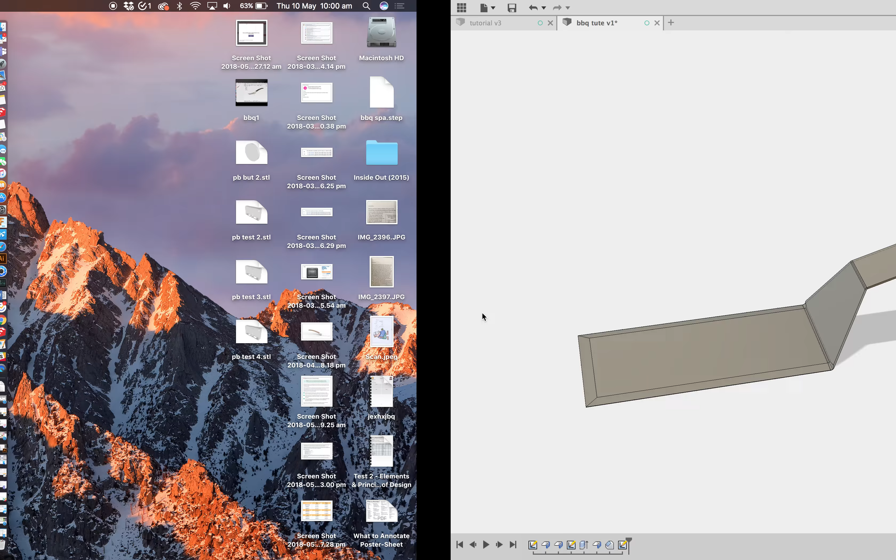Okay, today we're going to create the handle for our particular BBQ Mate that we've made. So we've made the blade in the last tutorial, and now we're going to actually make this handle here.

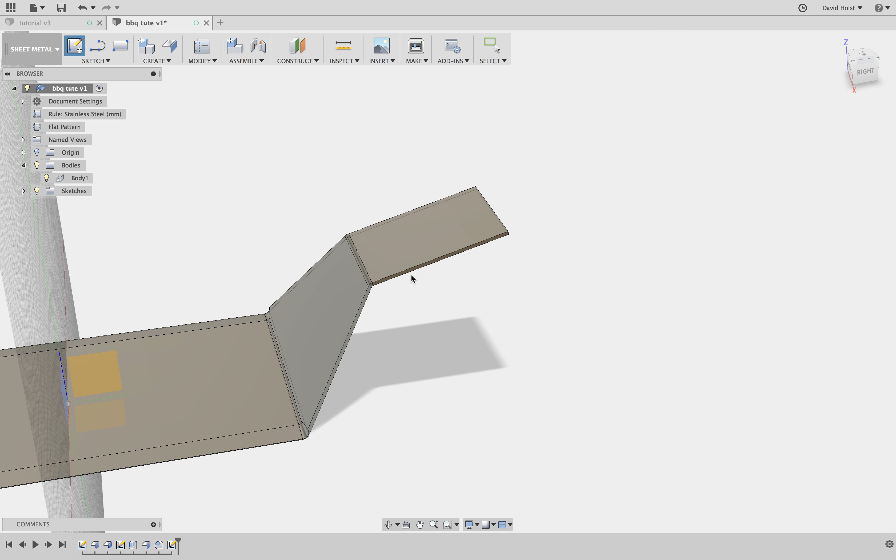The first thing we want to do is create a new body, which is this handle here. So we need to create a sketch, and we're going to use the edge of the tang here because that's going to be flush with the edge of the handle.

I'm going to roll my mouse over, so I just select that little part of that edge there, and I'm going to click, and it's going to bring me over to the right hand side.

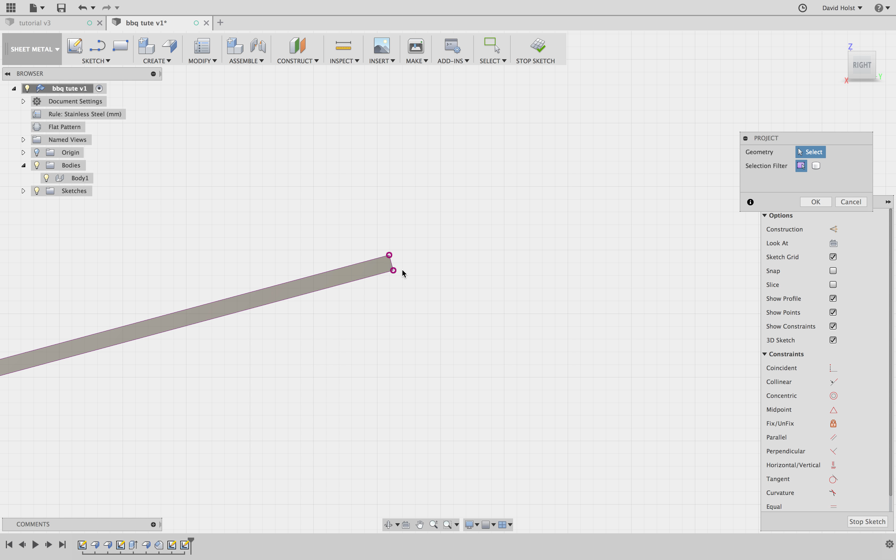The first thing I need to do is project the geometry of the tang through, so that I don't have to redraw it. So I hit P for project, and then I select these three lines here, and I'll zoom in a bit, and make sure I get the one at the back. Hit OK. And now I'm ready to start drawing the actual handle.

Now, I'm going to try and make this sort of blend in a bit better. I'm not happy with this angle here, so I'm going to go back and show you how to change that as well.

Later on, for example, if I got to this stage and I wasn't happy with this angle, what I could do is actually go stop sketch. And I could stop doing what I'm doing there.

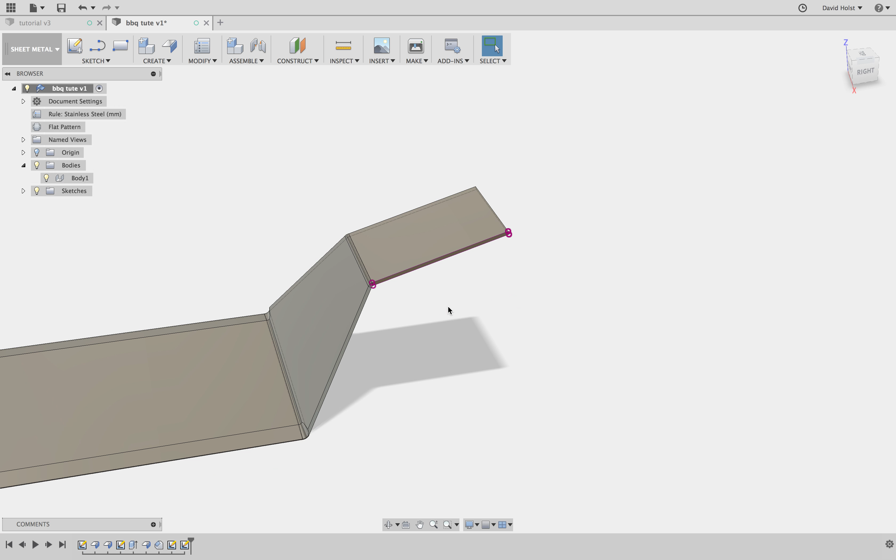And I can come over to the right hand side, and I could grab that flange, which is this one here, I'm pretty sure. So down here on my timeline, down the bottom, I could double click on that, and I could say I want that angle to be a bit flatter.

So I'm going to change that to 50 degrees, and I'm going to hit enter. And I've changed that. That's 100% okay. Now if I wanted to kick this handle up a bit here...

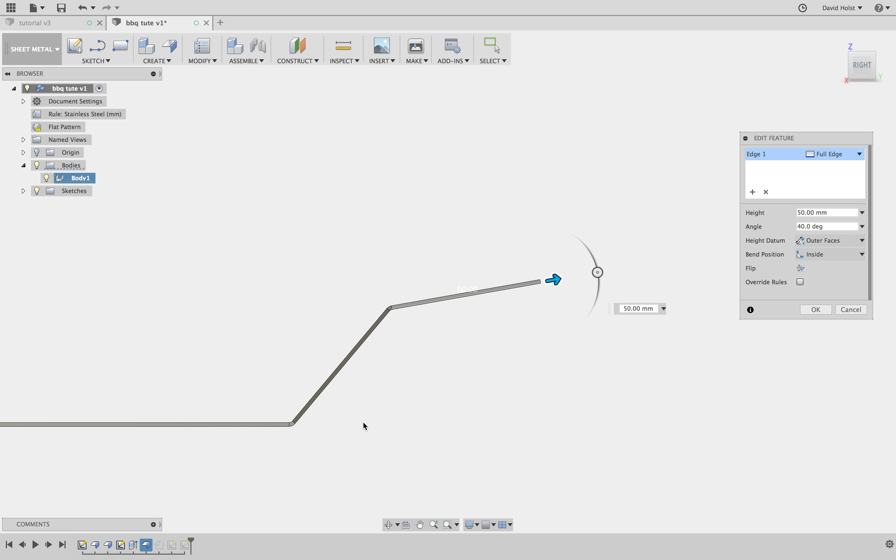I could double click on him there, and I might decide that I want to push him up to 35 degrees and hit OK. So that's the whole point of parametric modeling, is that you get this timeline so that you can continually adjust things.

And if I wanted to go back and go to the sketch I was working on, which is the last guy here, I double click on him, and now I'm back working on this sketch again like I was before. So it's always very easy to go back and change things if you want to.

So I'm going to start drawing. I'm going to hit L for line. I'm going to click on this dot here, and I'm going to push up perpendicular. And I'm going to call that, let's say, 4 millimeters.

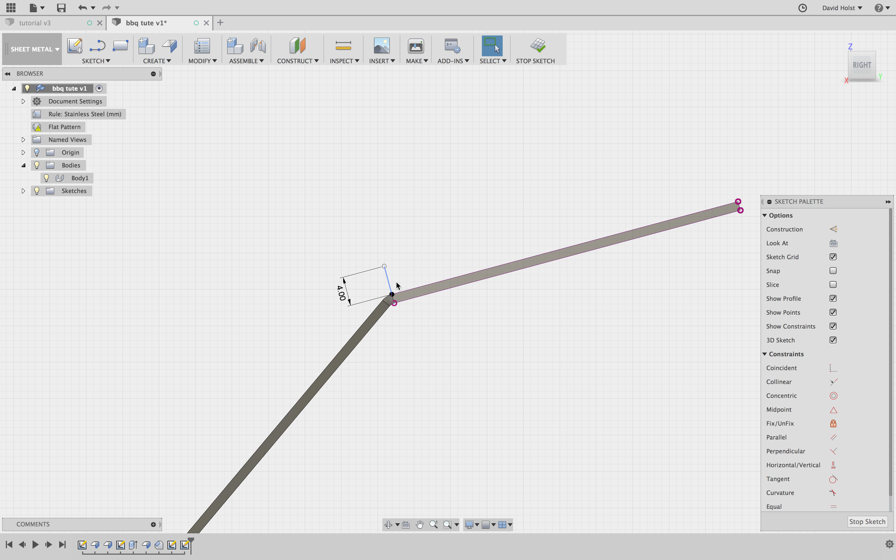And I'm going to do another one coming down here. I'm going to snap to the dot again, get that perpendicular snap, and you can see that by that little right angle icon that I've got there. I'm going to go another 4 millimeters.

And I'm going to zoom out and move across, and try and get a bit of a curve happening in this handle. Yeah, I'm going to sort of guesstimate this and do it by eye in proportion to the blade. So I'm going to hit S, type in arc, and do a 3-point arc.

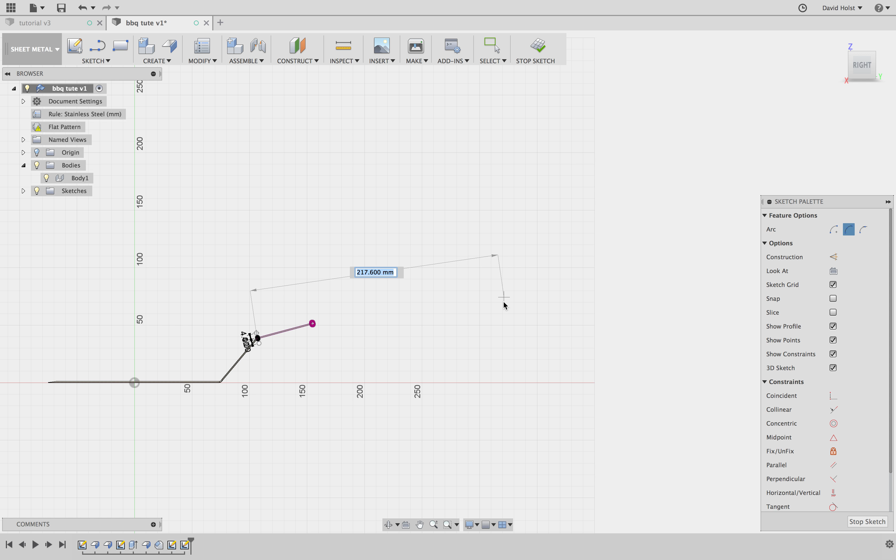And I'm going to select that dot at the end. I'm going to come back to about here, and do something with a curve in it, sort of like so. Okay, I'm going to do another arc on the bottom here.

Going to have a slightly fatter handle on this one, I reckon. I'm not quite happy with that, so I'm going to hit escape.

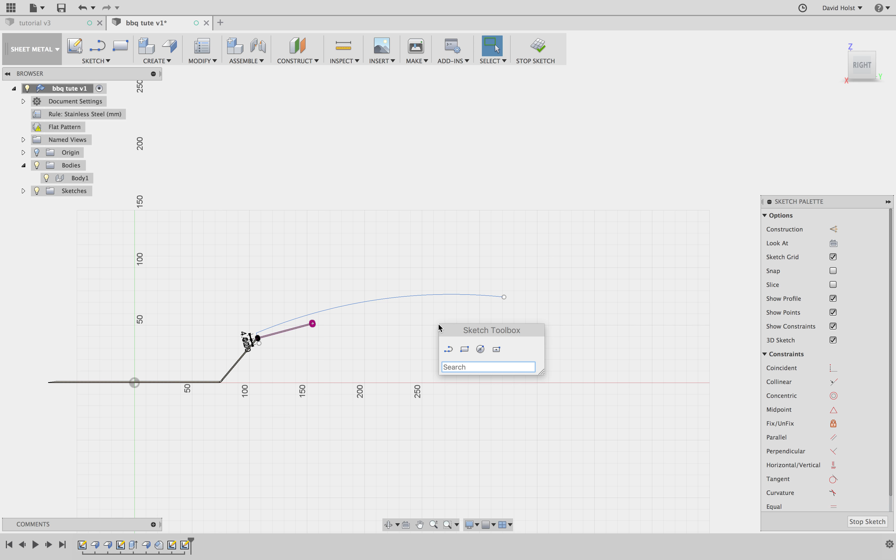S, arc. I'm going to have another go at it. Jump on there. Maybe just make it a bit thinner up here. Sort of like that, maybe. And then I'm going to get my line tool, and I'm going to put a bit of an angle on the back here.

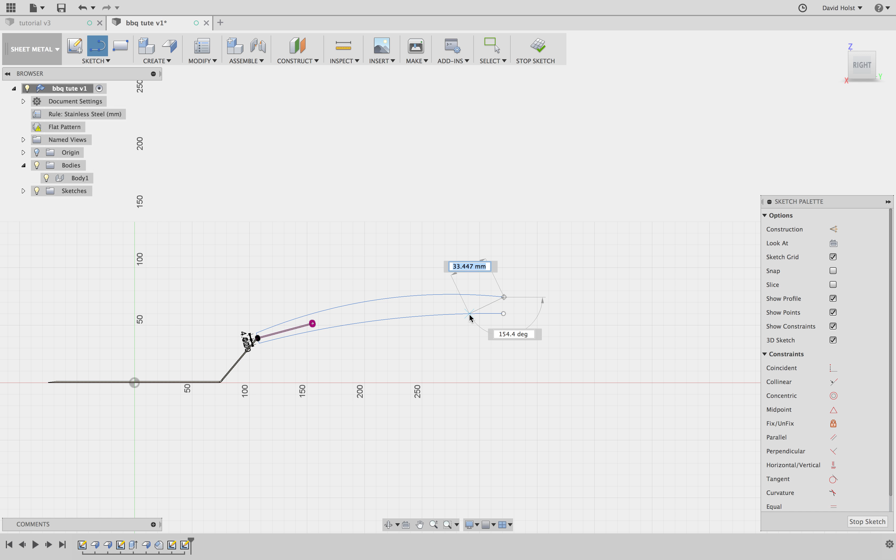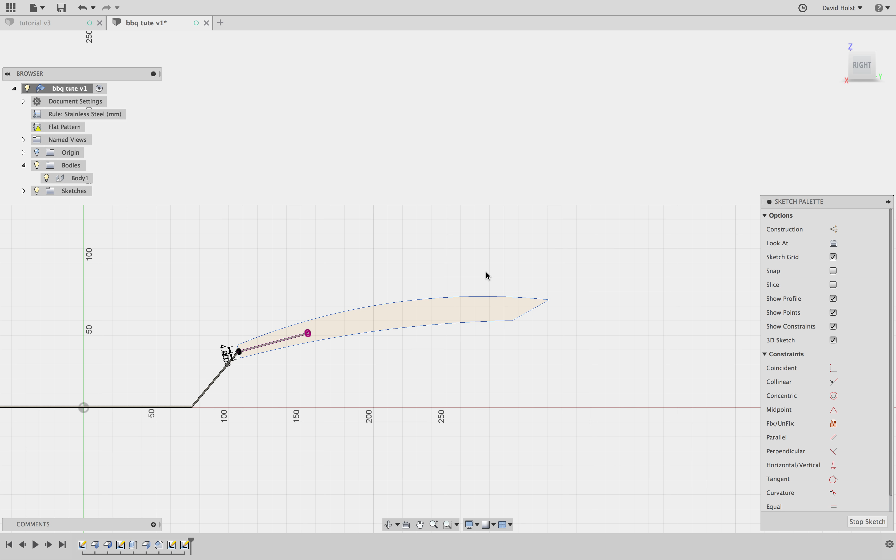I'm going to hit T for trim. I'm going to cut this section out here. Have a bit of a look and see what that looks like. It's quite a small handle, but I think that's going to look okay.

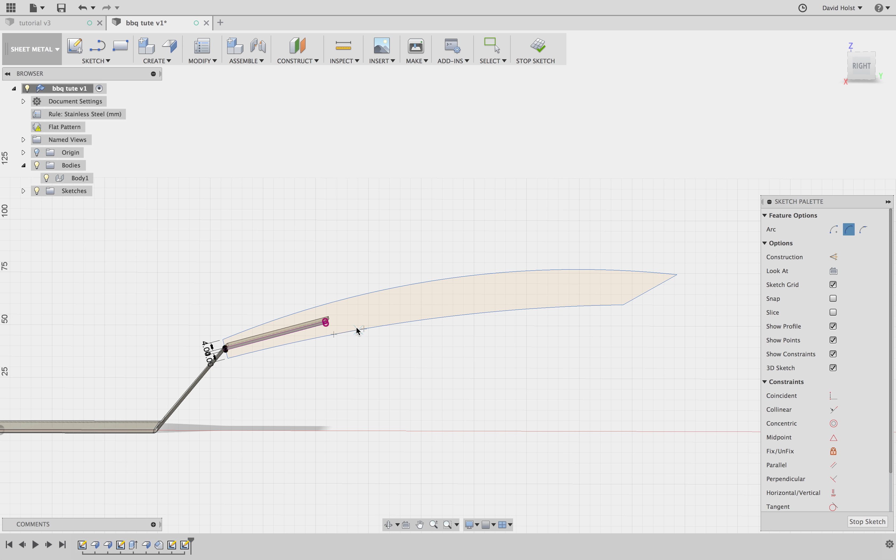Now, if I wanted to put, say, a couple of finger grooves in here, I could. So I could hit S, type in arc, 3-point arc, and I could just try and put in a couple of small finger grooves. I'm going to zoom in so I can see right. So I can go something like that. Something like that, so and so and so. You can easily change this shape to whatever you really want it to look like just by experimenting.

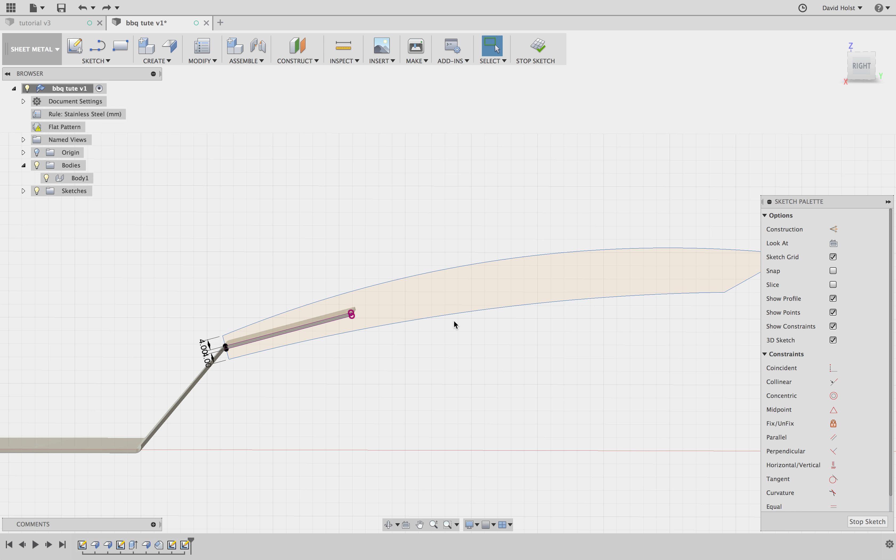I'm going to take them out because I don't really want them on mine. Now what I'm going to be able to do is actually extrude that shape and make my handle.

So if I hit E for extrude, I'll be able to click on that shape that I've drawn, and I'll be able to push it back 38.

Now it's getting upset at me because it can't cut something. So what I need to do is go to my extrude box and change some of these parameters. So the operation I'm going to change to a new body, and that's going to go back negative 38.

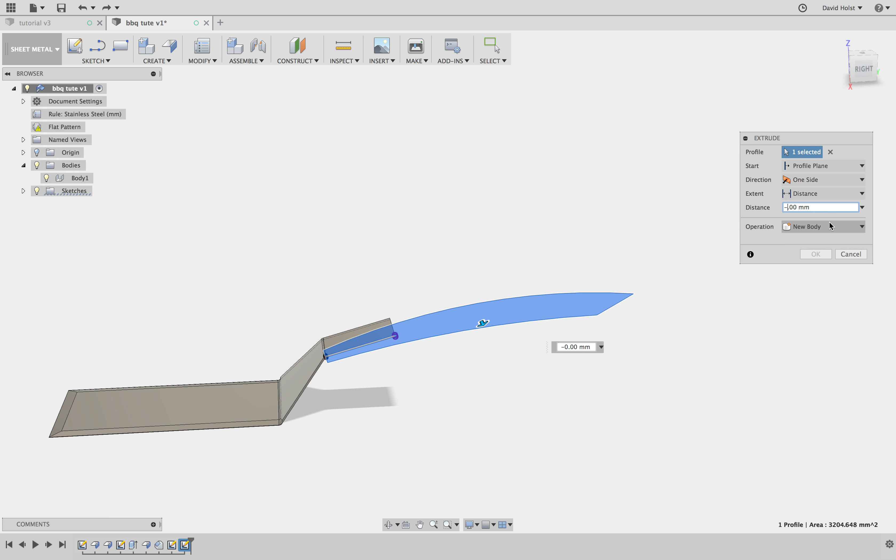And hit enter. I'm starting to get something that's pretty big and chunky, to be honest, but I'm starting to get something that looks like my BBQ Mate.

Okay? So I think the most obvious thing that needs to happen is I need some fillets. I need to start rounding some stuff off on this particular design.

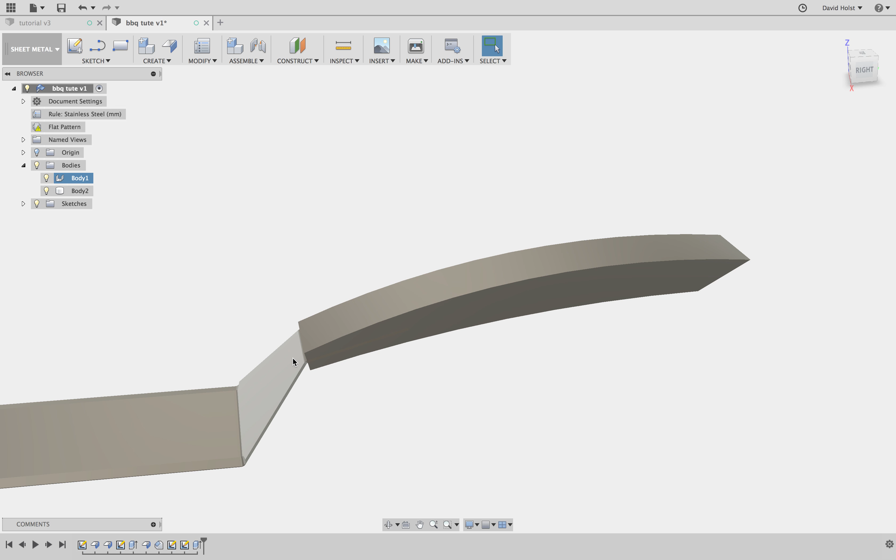So I think the first thing I'll do is I'll hit F for fillet, and I'm going to fillet these front edges off so they blend in. So I'm going to select that top edge there. I'm going to shift middle mouse button so I can see underneath. Select that one. I'm going to put maybe a 4mm fillet on those, I reckon, so they round in.

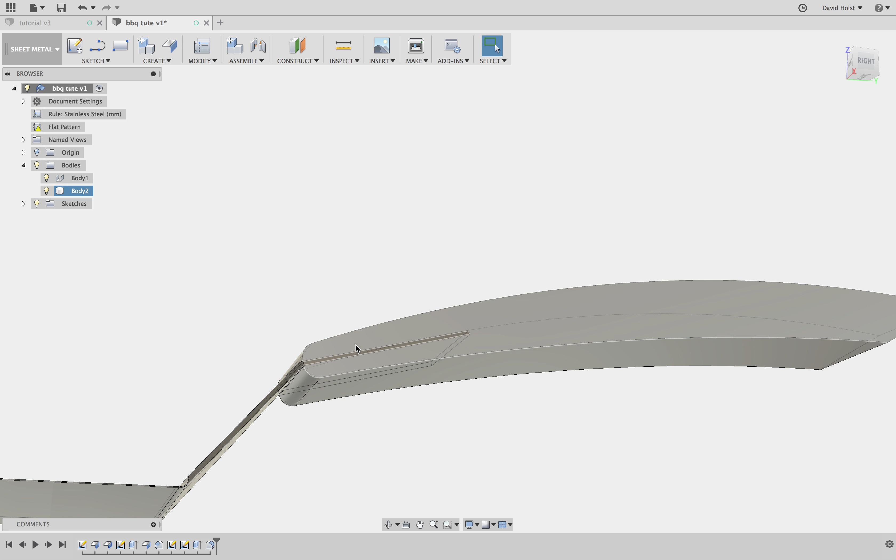Yeah, that looks pretty good. Probably going to round these ones off on the back.

So I'm going to hit F for fillet, this guy on the back. Type in 4. That's far too much. I think I'm going to go about a 2 on there.

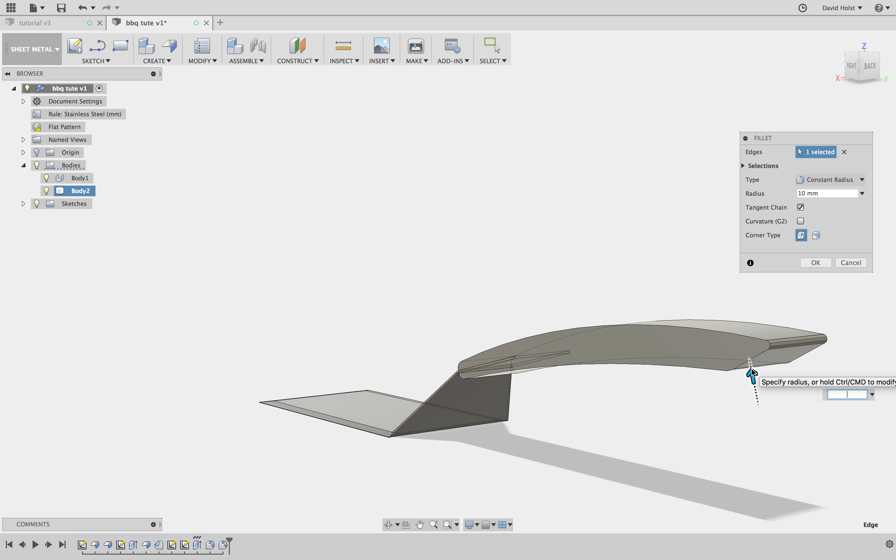F for fillet, this bottom one here. I want quite a big radius on that, I reckon, to make it look good. So I'm going to go 20mm on that one there.

And then now I need to actually round the outside. So I'm going to hit F, click on that one. I might as well do the other side while I'm at it. Shift middle mouse button. And I'm going to 4mm.

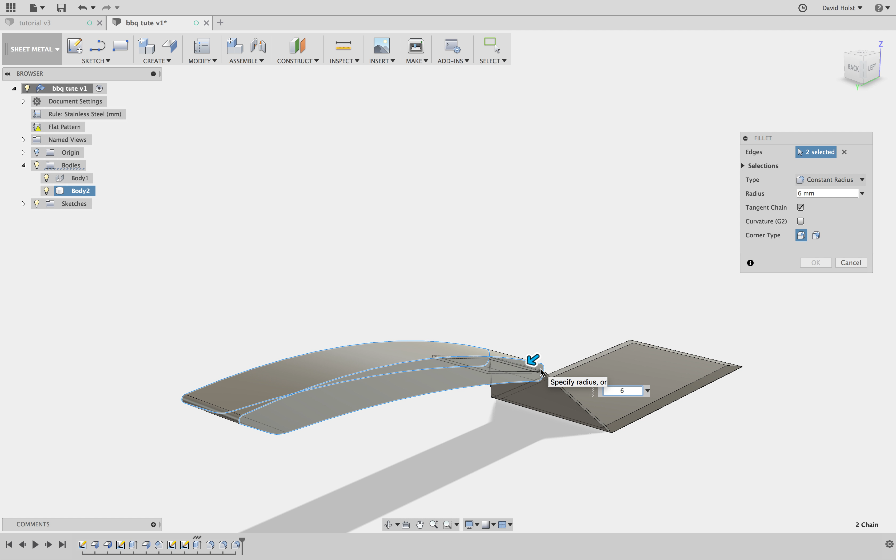Maybe 6mm. It's not going to like 6, not going to like 5, 4. Yeah, 4 is going to work. Oh, because of these middle round ones at the front. So I'm going to go 4 and hit enter.

And now I'm starting to get something that looks a little bit better.

Now what I'm thinking as well is I might actually put a hole in the back here. Now the hole could actually be quite difficult to draw because you've got a curved plane on here. So what I'm going to do is I'm going to actually create a work plane. So I'm going to go construct up here. Click on an offset plane, and I'm going to click on this flat part of the blade.

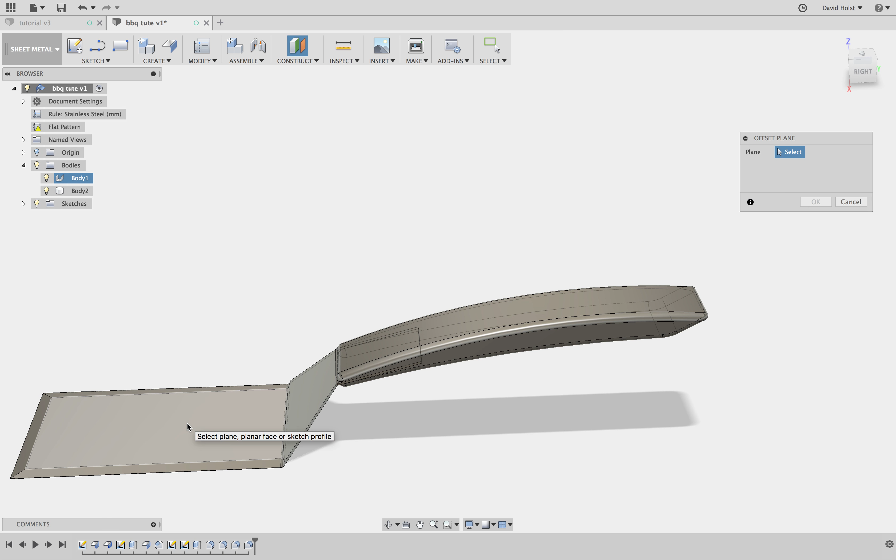Click on him. I'm going to push up, I don't know, 100mm should be fine. Type it in. Hit enter.

And I'm going to go sketch, and I'm going to click on this new work plane that I've created. Just going to bring us around to here. Now I'm going to make sure I can see the end of my handle.

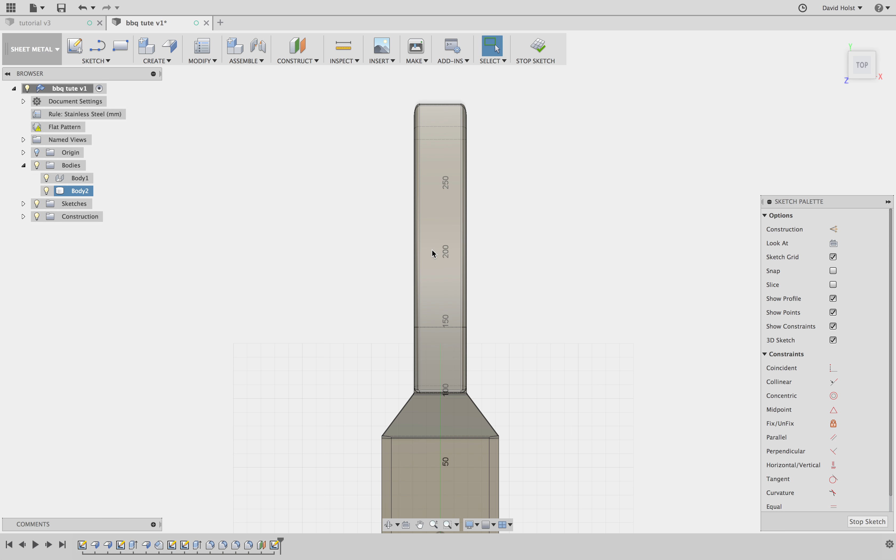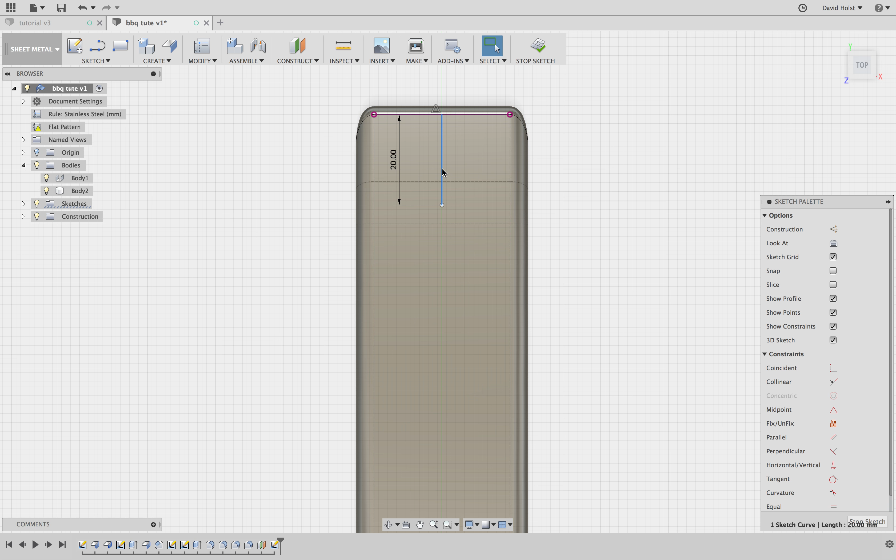First thing I'm going to draw is a center line. I'll hit L for line, snap it to that triangle there, push it in, and find the center point. I'm going to guess and come in about 20mm, since I've got a chamfer underneath it. I'll click on that line and hit X to turn it into a construction line again.

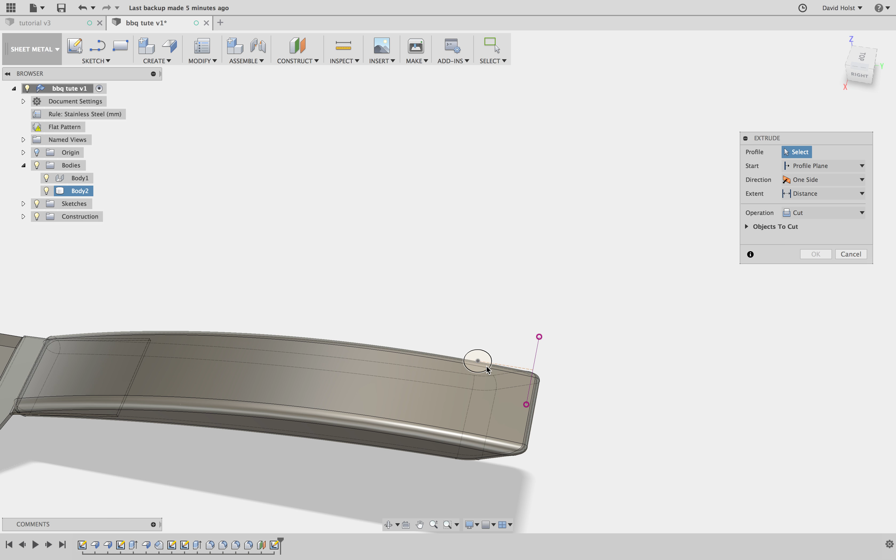Now I need to actually cut that hole through. I'm going to hit C for circle, snap it to the end of that line, and let's call this a 10mm hole. So we'll go 10, enter, enter. I'm going to use that to drill the hole out, hit E for extrude, click on that hole, push it the whole way through, and hit enter. And I've got a hole.

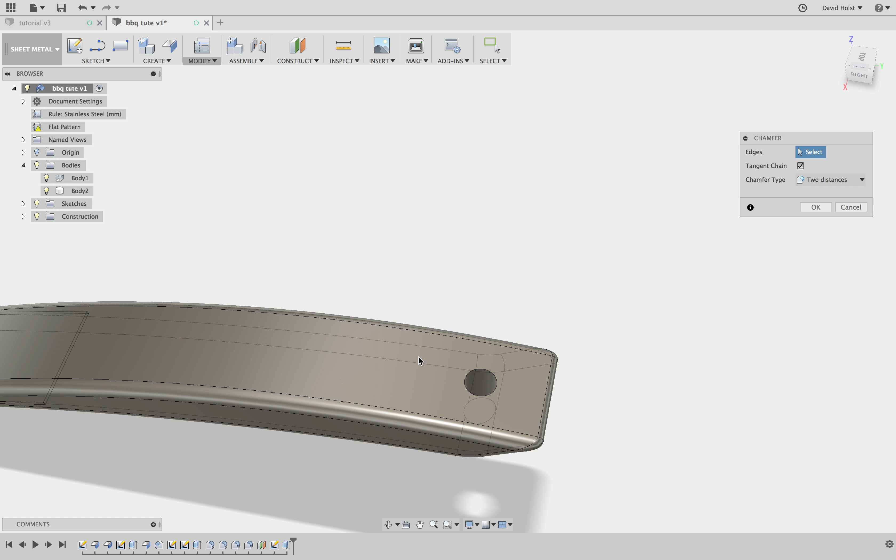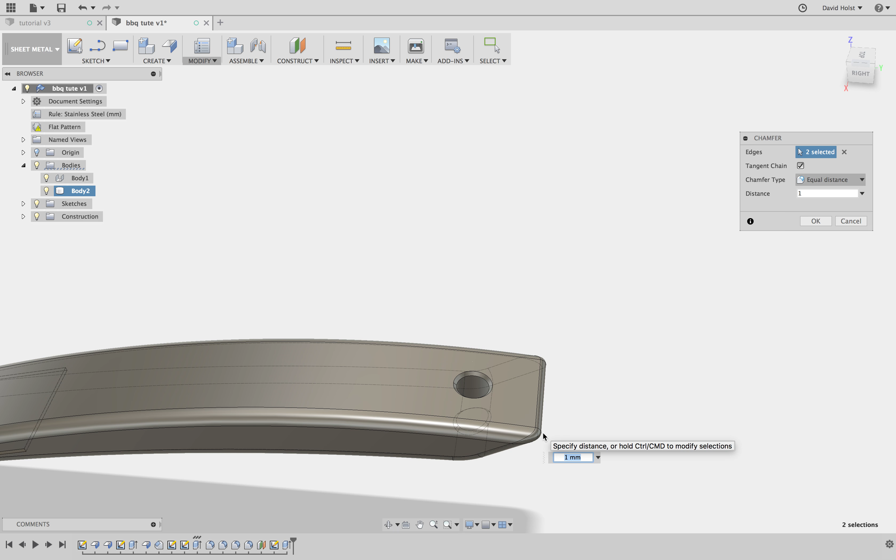Now I might chamfer that to make it look a little bit better. So once again, I'm going up to create, drop down to modify, drop down to chamfer. I'm going to select the top part of that hole to the top line, and I might see if it'll do it to the bottom line too. It might not like it because it's a compound curve. I'm going to go equal distances and call that 1mm. Let's see what that looks like. Yeah, I reckon that's pretty cool. Enter. And so I put a hole in it.

Like so, and I'm starting to get something that looks kind of like what I'm after.

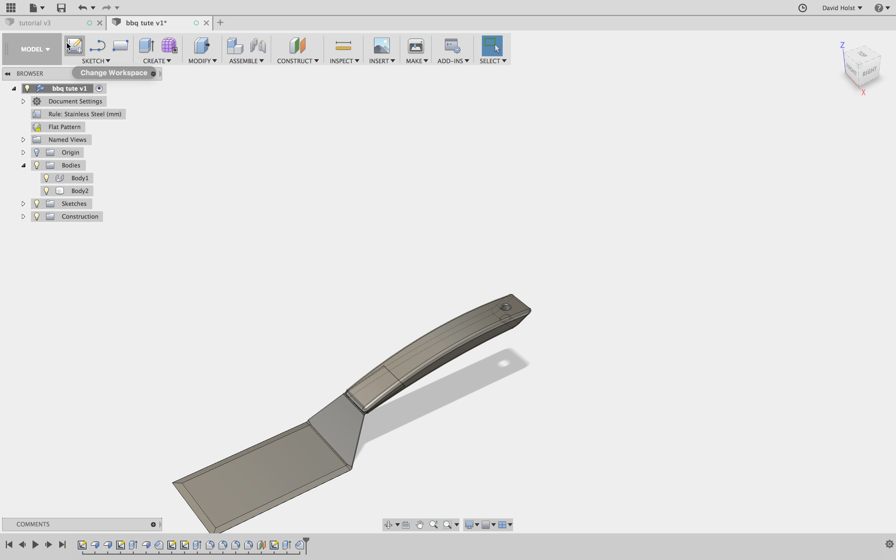Now, what I probably should have done as well before I made this handle, it doesn't make a huge amount of difference, but I probably should have jumped back into the model mode. It just changes the tools that are available. Luckily, the tools I was using were very similar between sheet metal and just the normal model mode.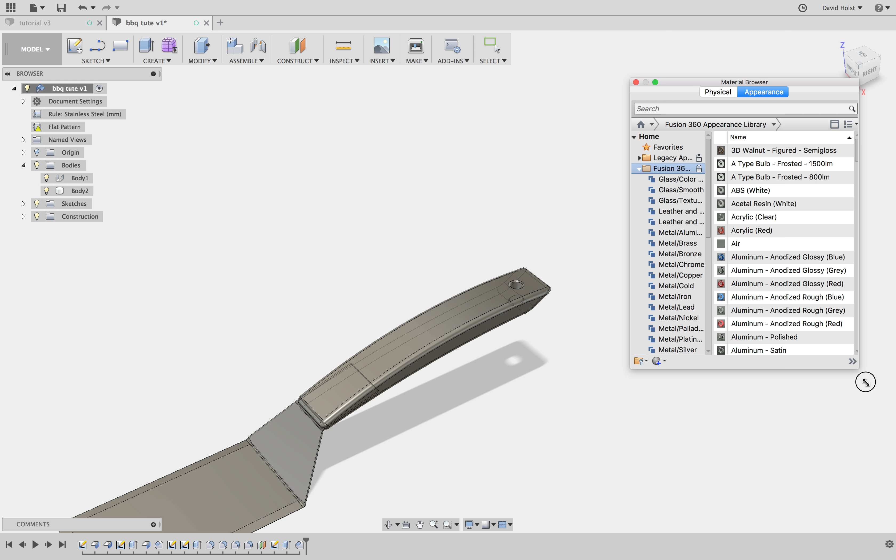So if I hit M for material, no, not that, I need to go up and hit S, type in Mat for materials, and bring up manage materials. I'm going to set some of the materials for this BBQ mate that I've drawn up. First thing, if I go metal, stainless, I'm going to go stainless satin, grab that one, and drag it.

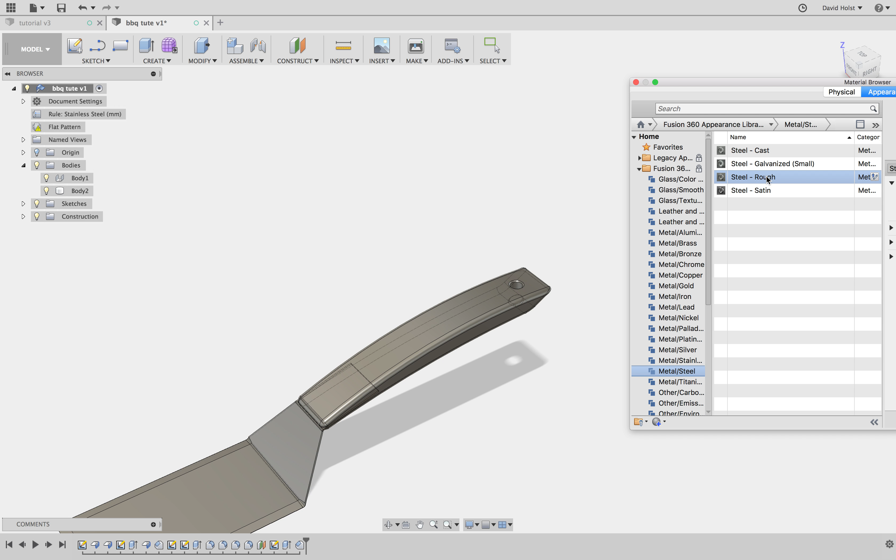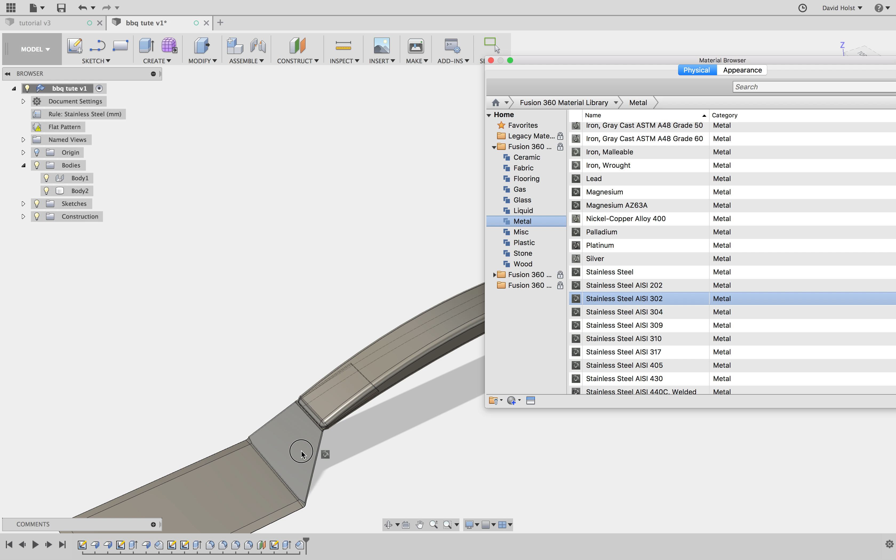Oh sorry, I need to go to physical. And what am I doing? Metal. Stainless steel. Interesting, alright, not letting me do that for some reason.

The other way you can do it is right click on your body here, and go appearance. So you select the body you're working on, this body 1, that's our blade. Right click, appearance, I'm going to go metal, change that to stainless. There's a whole bunch of different stuff we can have. Do they have one with this? Milled, hexagon mesh, steel cast.

Let's have a look and see what satin looks like. I'm going to grab him, drag him, and drop him over there. Okay, it'll look a little bit like what it's meant to look like, but we need to go into the render option to make it look realistic. So that's stainless.

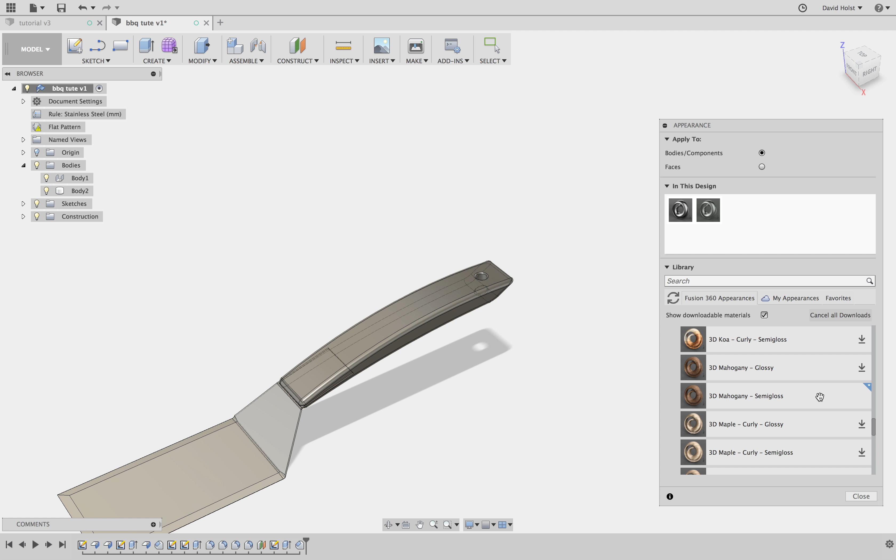And then if we go to get out of metal, we go to wood, finished, wood solid finished. Let's do a semi-gloss mahogany. Click the download icon. Some of these materials might not actually be installed, you might have to download them from the server. Then we get that one and drag it onto the handle. Cool, now we get something that starts to look like timber. Mahogany's not a bad one because it looks pretty close-ish to Jarrah.

And we're starting to get something that looks like what it is that we're trying to actually make.

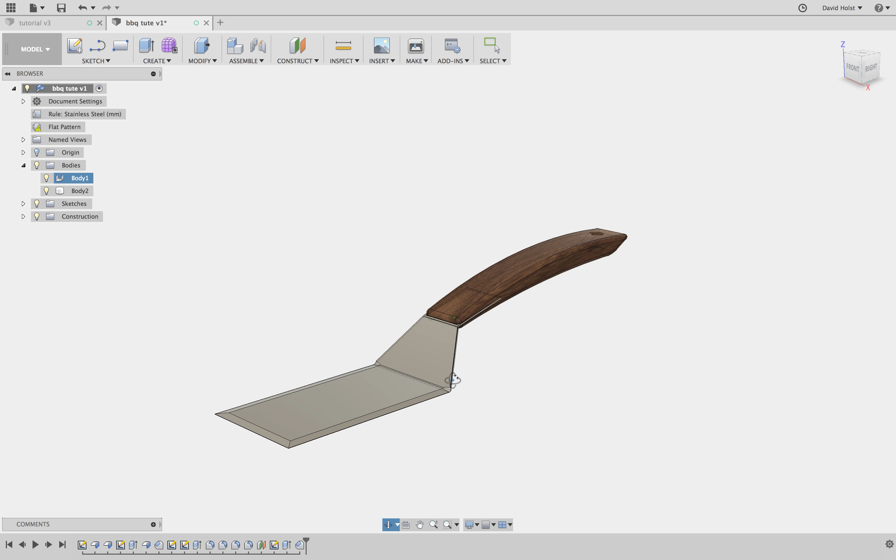So what we can do now is go up to model and go to render, jump in the render gallery here, and then if we hit the play button up here, we'll start to get an in-canvas render. What that's going to do is create a realistic computer-generated model of what our BBQ mate is actually going to end up looking like. You can let that roll out for a few minutes and it will give you a more realistic version.

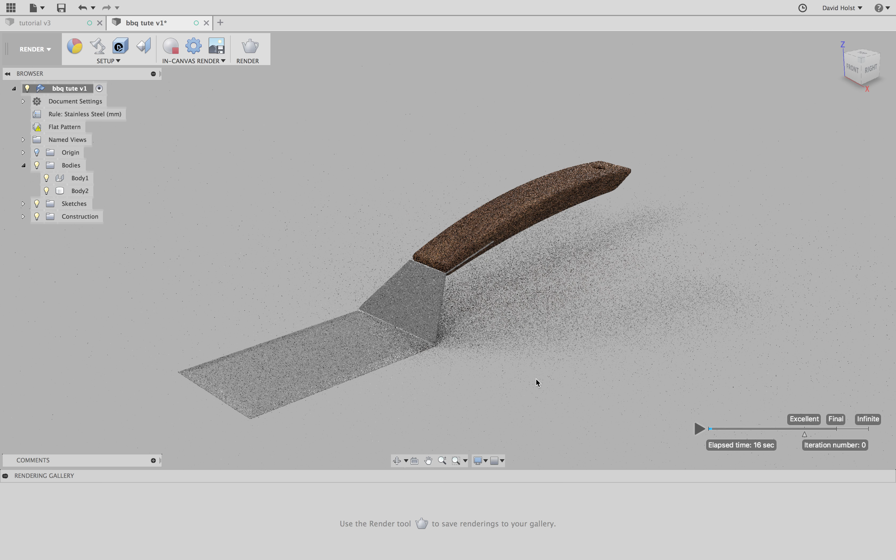And there you go, that's how you do the handle. Thank you.